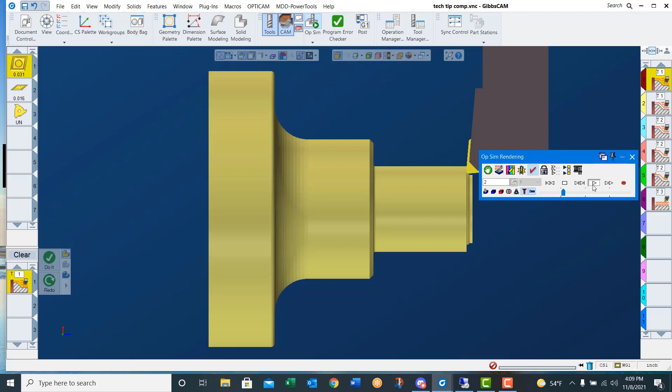In this month's Tech Tip, we will demonstrate how to use and save processes. Saved processes reduce the amount of time needed to program a part and allow you to save custom tools and tool holders along with information such as stickout length and comments. All speeds, feeds, and depths of cut will also be saved in the process, making for a more consistent look to your programs.

I've arranged my process by operation type. There are no limits as to how you arrange your list. You may choose to arrange them by tool number or any other criteria that works for your programming.

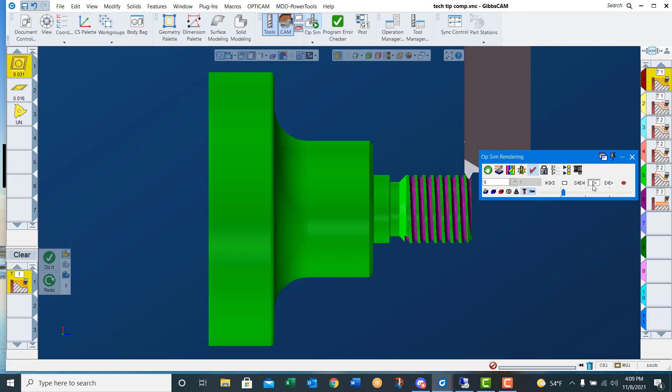Let's stop this simulation and take a look at my process list that I created on my desktop. You can see that I've got lathe, turning, OD, 80 degree, rough. There is no face process in here. I purposely deleted it so that we can build it right now.

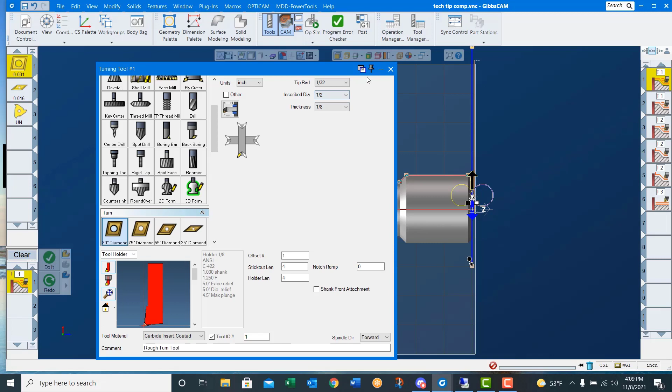So let's open up the project we were just simulating. You can see I've got the 80 degree tool built here. Here's my rough face. Once you've done the process, you can then save it as a process into a list.

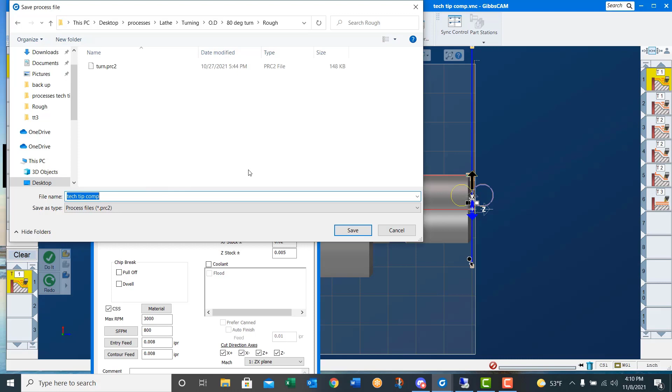So I just activated it. I'm going to right click and say Save Process List. We navigate to that folder I was just looking at, lathe, turning, OD, 80 degree, rough. You see I got a turn. We'll now put a rough face process in there. Face, enter, and we just saved it.

Now let's look at using all of these processes to turn this part. First thing you need to do is set the folder, so that tells GibbsCAM where to go looking for our processes. In this case, it's on the desktop processes, and all I got to do is hit select folder.

Now when I right click and say load process, lathe, turning, OD, 80 degree turn, rough, face, you see it built the tool, it built the process. All I need to do is set my markers and choose the correct direction of travel, and we should have the part rough faced. Say do it.

There we go. I used material only, so I don't need to be very careful about my marker placement. We'll go right click, load, lathe, turning, OD, 80 degree rough, and turn.

Now I need to set my markers appropriately again. We'll move our end feature down here, move the end point off of the part, and we'll say do it.

I did not dive down into this thread relief area because when I saved that process, I purposely had no X minus checked. So we'll go lathe, turning, OD, 35 degree. We're going to rough that thread relief out now. I also saved a process for that. You see it just built the 35 degree tool. We'll set our markers appropriately using material only again and say do it, and it roughs out the thread relief for us.

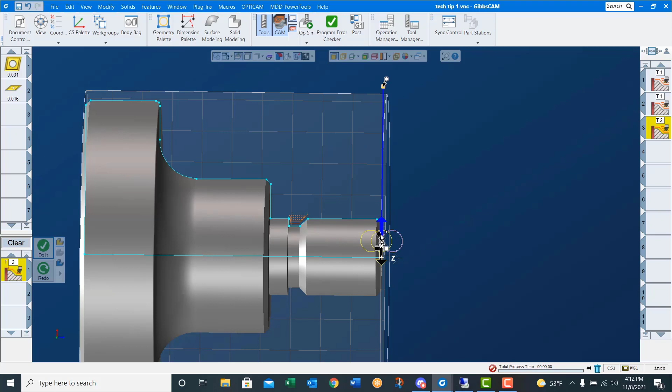Now we'll right click, load list, lathe, turning, OD, 35 degree, finish, face. Choose the end face. Make sure to move our markers where they need to be. Choose the direction of travel, correct side of the line, say do it. And we just finished face the part.

We'll right click, load process, lathe, turning, OD, 35 degree, finish, turn. Once again, we need to set our markers. That's all we need to do. Make sure to choose the correct direction of travel, correct side of the line, say do it, and it turns the part. You can see here I had no drag selected when I saved that process.

We've got one thing left to do here, and that's just to thread this part on the end. So threading, OD thread, imperial, 1 inch 8, and when I say do it, it builds the tool, it threads the part based on the criteria I saved when I saved the process.

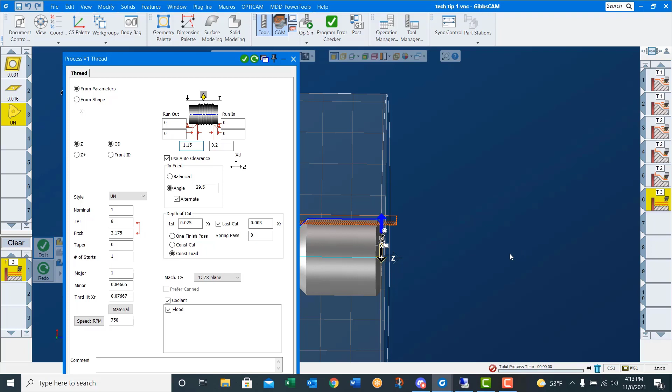So if we think that's a little too long, all we got to do is open the process up. Now instead of going -1 inch 200, let's go -1 inch 150 and say redo. Now when we look, we went 1 inch 150 instead of 1 inch 200.

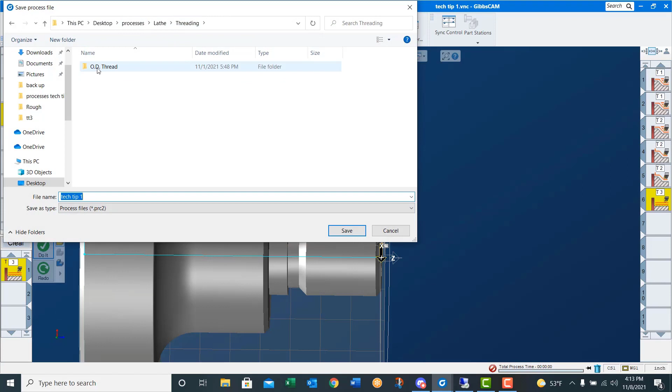Now if we want to overwrite our existing process, we've got the tool, we've got the process called up. We go right click, save process, drive into our process tree that we created. There's that 1 inch 8 thread. If I just single click on it and say save, it asks me if I want to replace it. Yes, I do. Now that process has been saved with the new depth of cut.

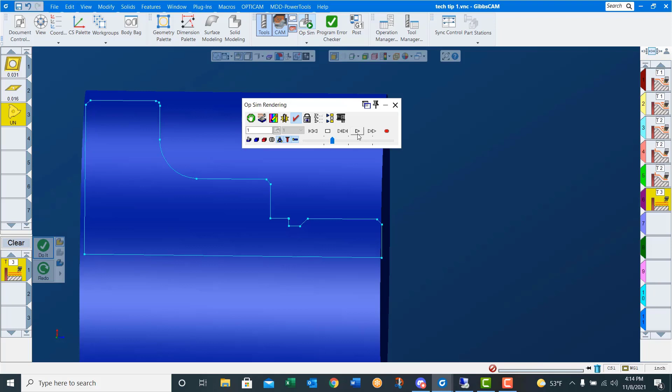Processes reduce the amount of time needed for programming in GibbsCAM. I highly recommend you contact your reseller if you have questions about it. Thank you for watching this month's GibbsCAM Tech Tip, and have a nice day.